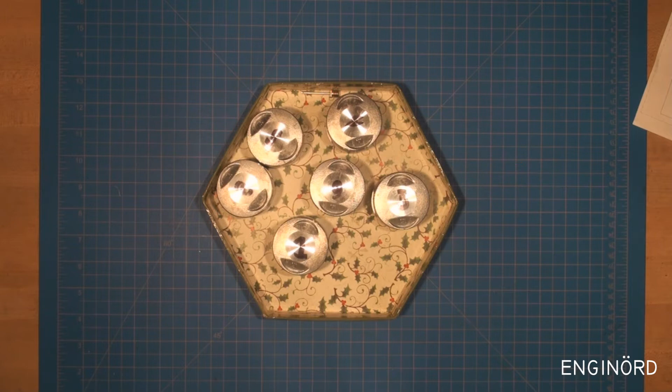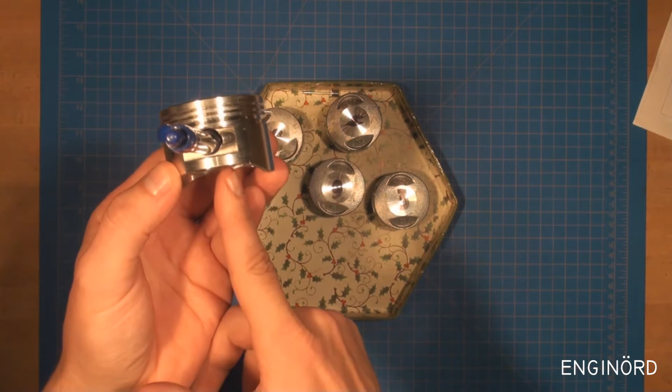Tonight we'll be talking about measurements, in particular measuring piston offset. We've got a couple pistons here from a Honda clone. Basically it's a Chinese clone of a Honda Cub engine. The bore on this one is 54 millimeters, and it is considered one of the newer engines that's out there.

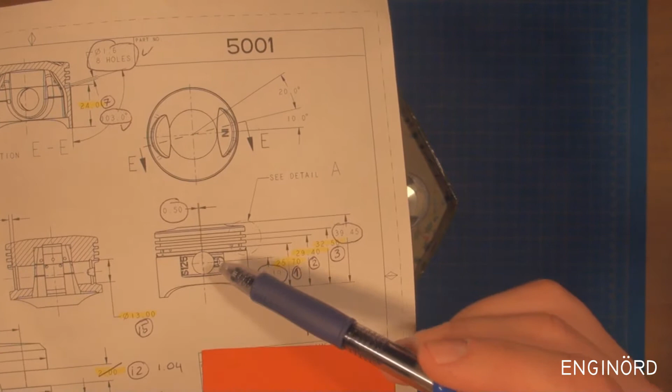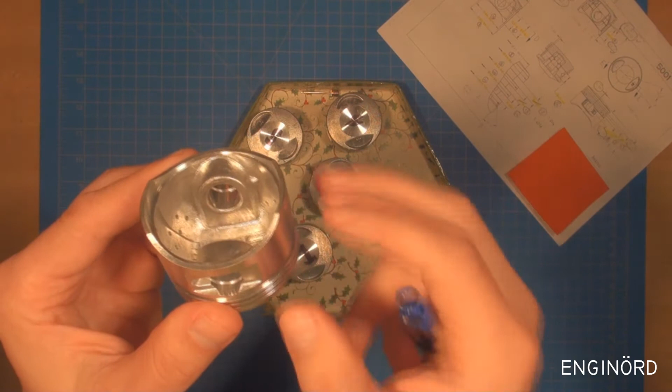Basically you can see on any of the newer pistons that there's a marking for the inlet valve, and so it's important that when you assemble the piston you orient the piston properly. When you join the piston with the connecting rod, you can join it this way, or you can turn it 180 and join it that way. Seemingly there is no difference. But if you don't do it in a proper way, you can degrade the engine performance considerably.

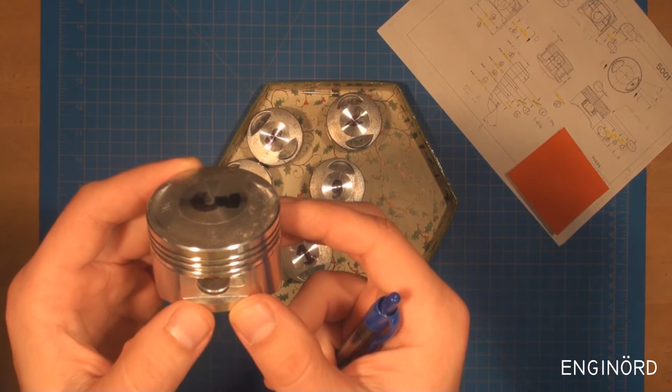What the engine designers do these days is offset the piston pin to one side. Typically it's being done to the inlet side. So wherever you have the inlet marking, that goes towards the inlet valve, and so this pin is being moved to that side. The distance is not much. It's typically less than 1 millimeter.

So what we will end up with is that the wrist pin axis, so this is the wrist pin axis, you can imagine an imaginary axis that goes through there, will not intersect the axis of the piston, which is here, so it's offset to one side, and that is the dimension that I'm trying to measure.

I created a preliminary drawing for the piston, and all the other dimensions I already measured, and this is the only dimension that I have not measured yet. I have a 0.5 millimeter offset shown here, but I'm not sure about it. This is based on the 3D scan data. We did a full 3D scan of the piston to establish especially these internal cast features.

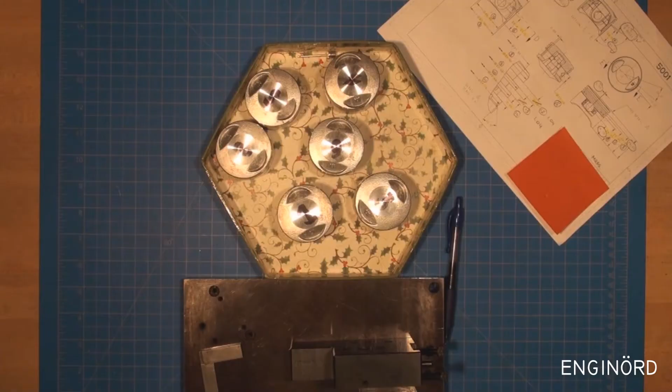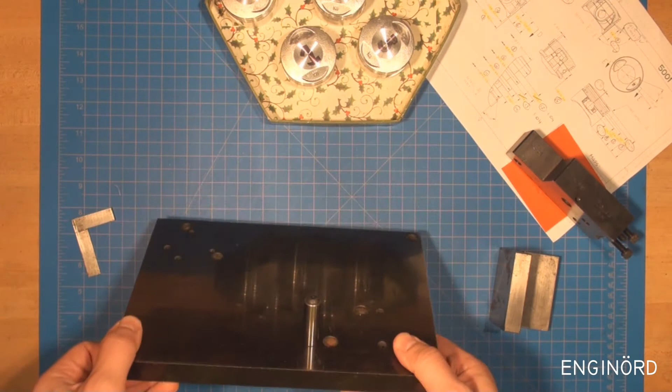A lot of these cast features are hard to measure with calipers or any other ways. It's easy to measure the outside dimensions, the machined dimensions, the thickness of the groove, this diameter, or this bore size with a caliper and other means. But getting to these nitty-gritty internal sizes and dimensions, figuring out if this is a cylinder, a taper, a cone, or whatever surface that is, that's why 3D scanning is great.

So based on the 3D scan, there's an offset to the piston. I think it's around 0.5 millimeter, but I'm not sure about it, and that's what I'm trying to measure. Why do they do it? There are multiple reasons to offset the wrist pin. One of the reasons is piston slap.

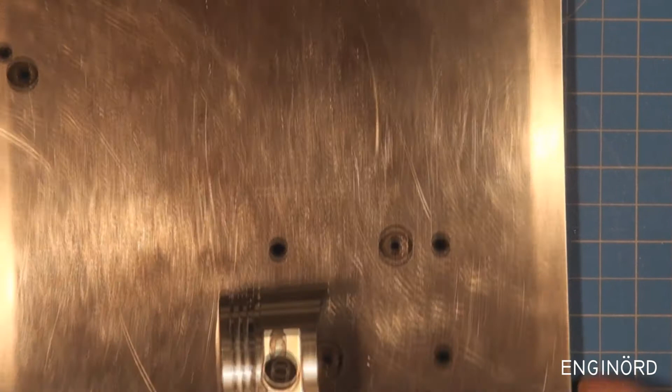When the piston is moving up it's going in one direction, and coming down it's going in another direction. So there's a moment at top dead center and bottom dead center where it's changing directions. That's when they say the acceleration goes to infinity. Obviously it's not infinity, it's some really high number, but that's when the piston slap happens, and that contributes to noise, and the designers are trying to minimize that noise.

Another reason why they do the offset is to decrease the frictional losses. The piston goes up and down, it's got a lot of friction with the cylinder wall, and to decrease those losses they do the offset. And some of the designers say that the most important reason is basically softening the reciprocating loading.

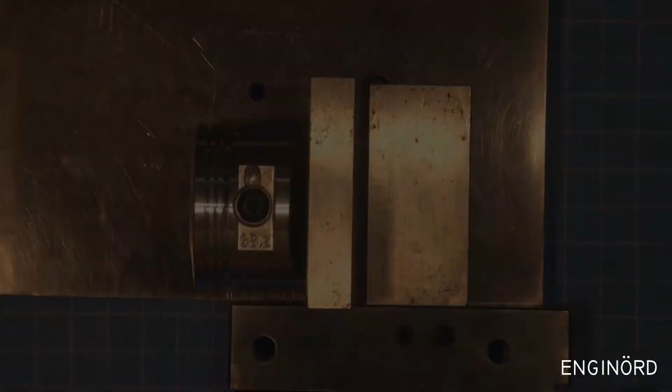The head of the connecting rod, the wrist pin, is offset relative to the center of the piston, so that the piston and the connecting rod are not going to reach top dead center at the same exact moment. That will spread out the impact loading at top dead center and at bottom dead center. And so I think that's the primary reason why they offset this pin.

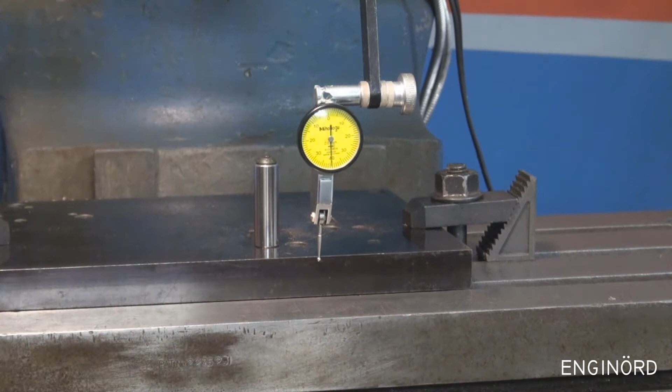So here's my idea of how I'm going to measure it. I got this big plate. It's a rather heavy ground steel plate, and on the plate I installed the wrist pin for that piston. I got it bolted down, and you can see that it's perpendicular this way, and it is perpendicular this way.

Okay, so now if I set this down here and I put the piston on it like so, let me get you closer.

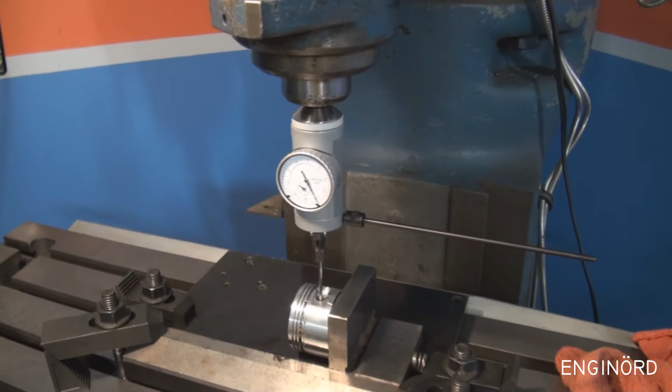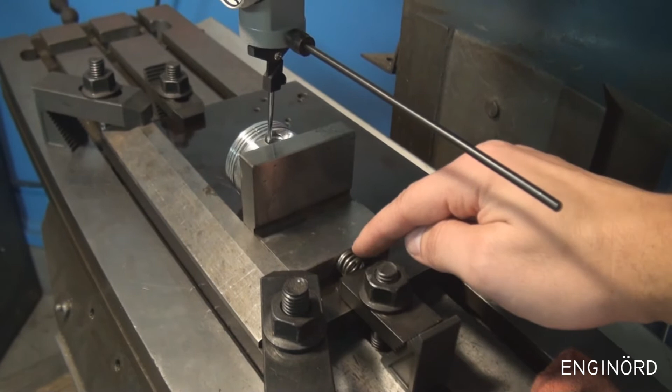Okay, so I put the piston on it. Out of the 6 degrees of freedom, I basically got rid of 5. Okay, so the piston is not moving in this direction, in this direction. It cannot rotate this way or this way. It can move up and down, but I can easily hold it down with some kind of bracket, some kind of mechanism. The only way the piston is turning is this way, okay, side to side.

But I can prevent that by adding another piece parallel to it like so, and then using this angle bracket, and when I push the angle bracket relative to that, then it will align the piston. So now I know that the side of the piston, this side, is parallel to the edge of the plate. So now I can set this up on my mill and use basically the Bridgeport mill as a CMM and measure the piston offset. So let me set it up and I'll get you guys back.

Okay, you can see the setup here. 1952 Bridgeport mill. I bolted the plate down to the table. Got this indicator, and the indicator is basically showing the run out, and you can see if I advance the table, it stays put. So the indicator is actually being held by the edge of the plate.

So now I reset to 30. So if I go to the other direction, you can see that the needle stays put. So now I know that this edge right here is parallel with the travel of the table. So that's the X direction.

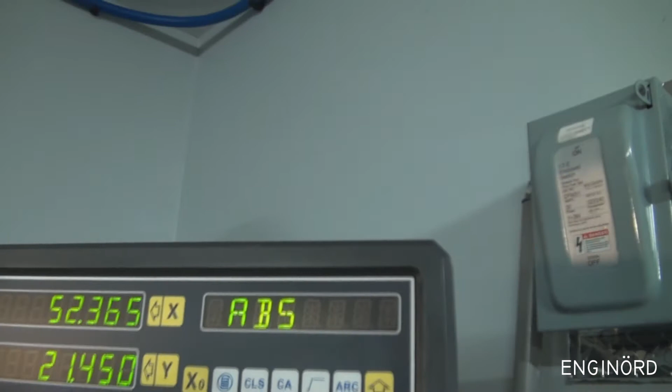Okay, so here is the second part of the setup. The first part is basically placing this plate on the mill table, and then I created this fence. Okay, this fence is parallel to the edge of the plate, which I indicated earlier. So this side, this back side of the fence, is parallel to the direction of travel. And what I did is I added this angle bracket. There's a little spring, and the spring is loading the angle bracket against the piston along the fence.

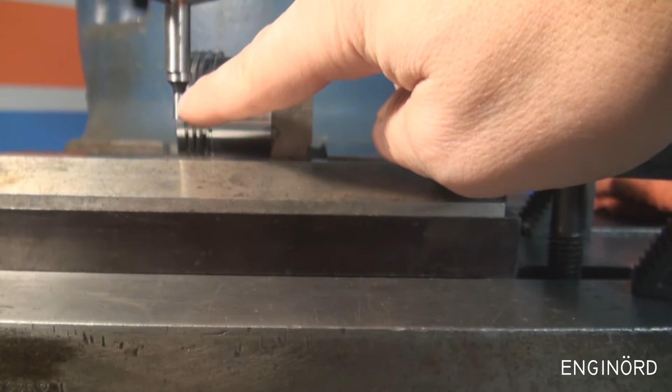So now I'm sure that to a certain accuracy, the side surfaces of the piston are parallel to the direction of X travel. Sorry about the noise, my phase converter is making the buzz.

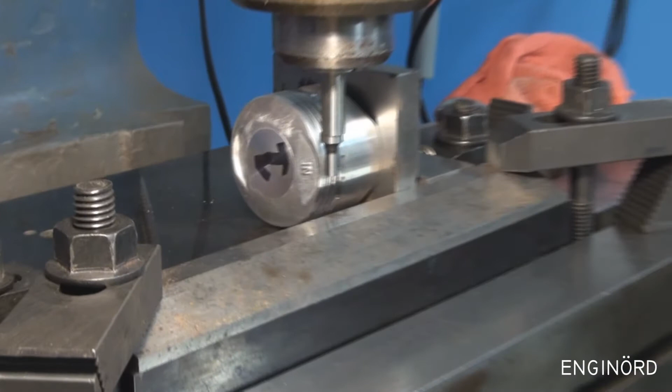So the next thing I did is I installed a coaxial indicator. Okay, so I need to put down the camera, and I'm going to turn on the mill. And what you're going to see is that the mill is running, and the coaxial indicator is testing the internal bore of the piston. Now if I start moving the y-axis, you can see that the needle is going to stabilize. And if I move it more, the needle will go out of whack.

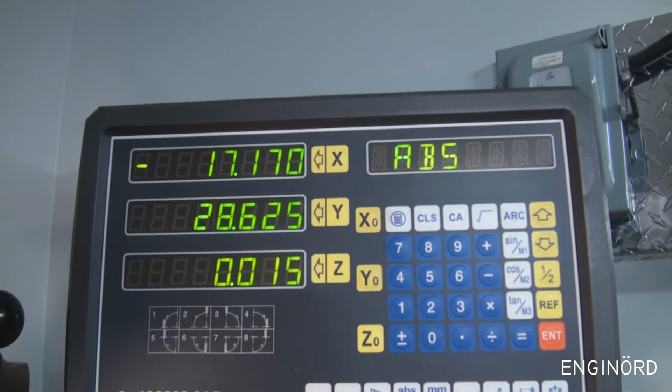So I'm going to go back and stabilize the needle and move the y-axis and move the x-axis until it completely stabilizes. And then once we're in that position, I can shut this off and I can go and zero out the x and y reading on my readout. So here's my readout, that's my y0 and x0. So now I know that the center of the spindle is coaxial with the center of the wrist pin.

So the next thing I'm gonna do is put in an edge finder and then find this side edge and find the other side edge and basically do the measurements. So now I have the edge finder installed, and what I did is I lined up the edge finder to this top diameter on the piston. Okay, you can see that it's lined up and it's somewhat below that diameter, so where the edge finder would be touching the piston.

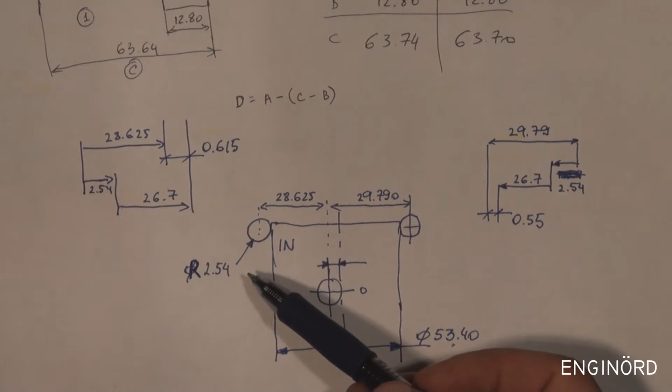So now I'm going to turn on the mill and use the edge finder to find that edge. Okay, so we're going to be coming in, and when it breaks off, that's when we know we found the edge. Okay, right there.

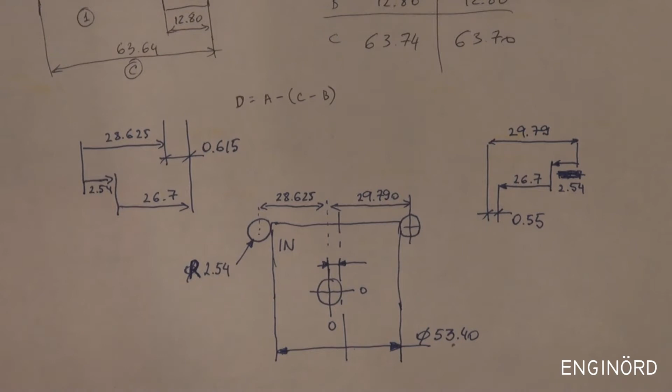So you can see that the edge finder broke off, and what we're going to do next is record this Y distance. So 28.625. We're going to go and do the other side. Okay, so I set it up for the other side. What I'm going to do now is just use the edge finder to find that edge.

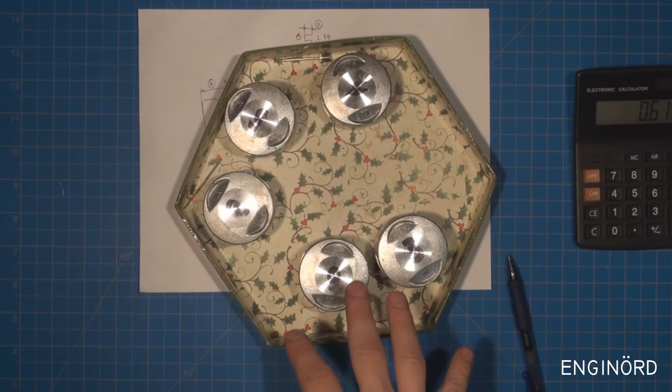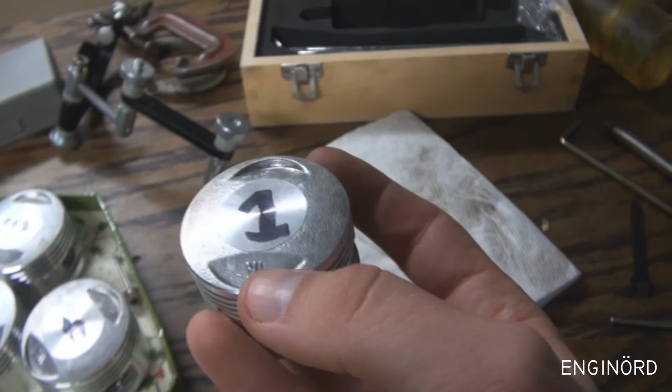Okay, so right there. Okay, so right there. So I found that edge. Now if you look at the display, you can see the reading is different. So 29.79. So we're gonna make a record of that.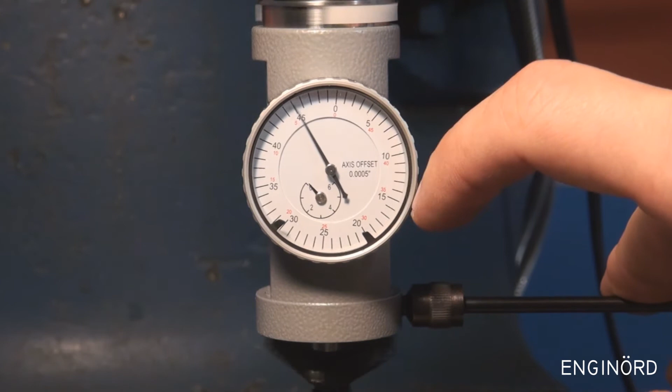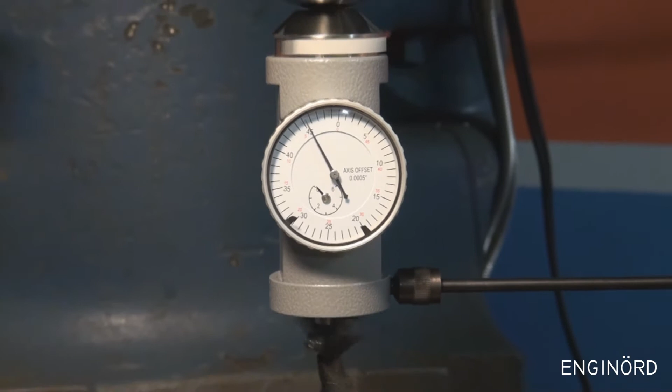So what I'm gonna do next is I'm gonna set up the other 5 pistons, and I'm gonna measure them the same way, create a table, and then basically just average it out and see what the average is showing.

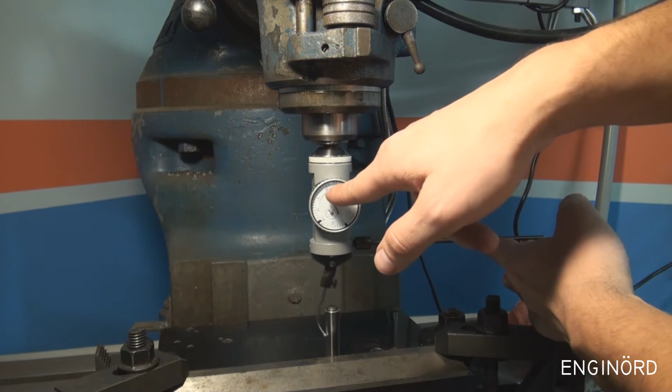So when I started measuring these parts, I looked at the piston again, and this was the number 1 that I first measured. You can see the intake is here, so piston was resting like that, and what you can see is that the coaxial indicator's tip left an imprint inside the bore, so I didn't want that to happen to the rest of the pistons. Right there you can see that groove. So this tip that I used on a coaxial indicator, it's hard steel, this is soft aluminum, so it created that imprint, and I don't like that.

So what I did is I went back and I installed this different style of tip on a coaxial indicator, and basically indicating the pin, and it was a lot easier to go back to 0. And I want to show you, I need to turn it on, but at the same time I need to hold this with my hand. Let me get you back. Okay, so we are back, and what I'm gonna do is turn on the mill.

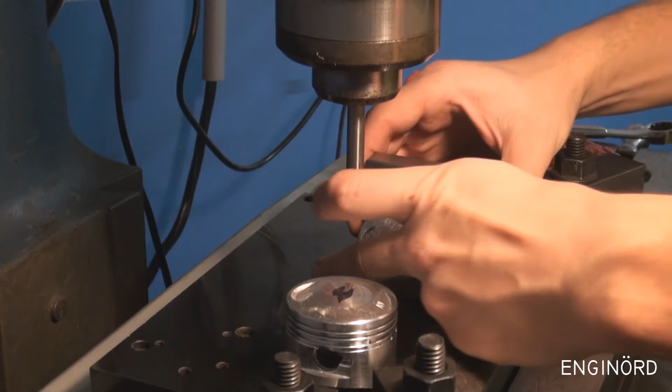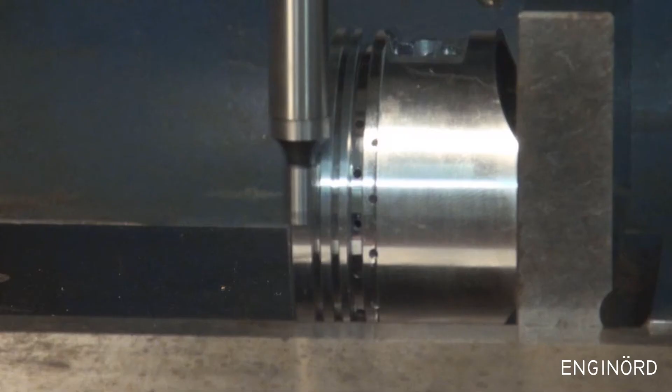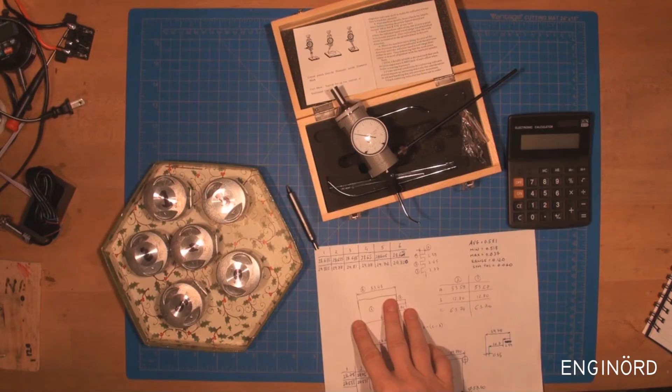The other interesting thing is, if I zoom out, you can see that the tip of the indicator is right at the top of the pin. Now if I start sweeping down, I am moving down the quill, and you can see that the reading stays the same. So that gives me high confidence that this pin is not only at the center, but it is perpendicular to the plate. If it were at an angle and I sweep down, then the reading of the indicator would be off. But you can see I can sweep up and down, and that reading doesn't really change. So what I'm going to do is use this setting and go ahead and measure the rest of the pistons.

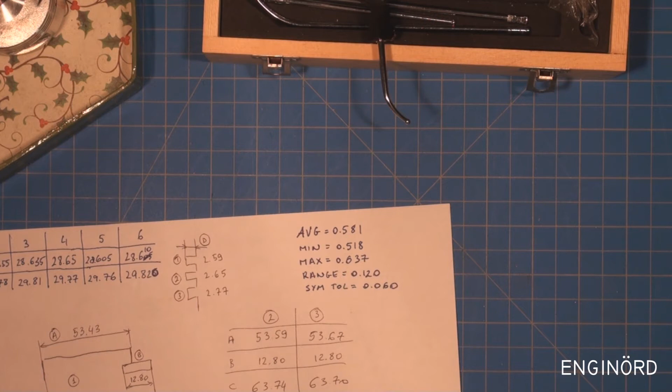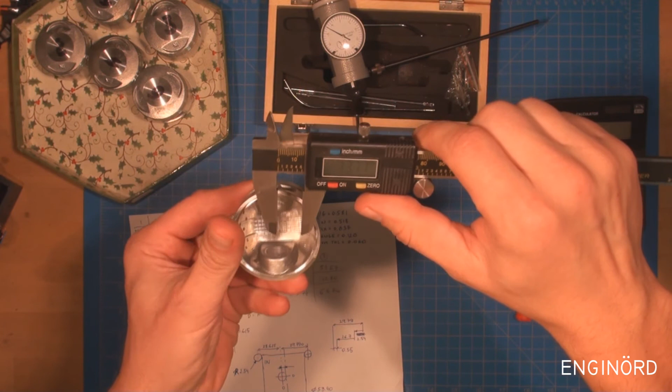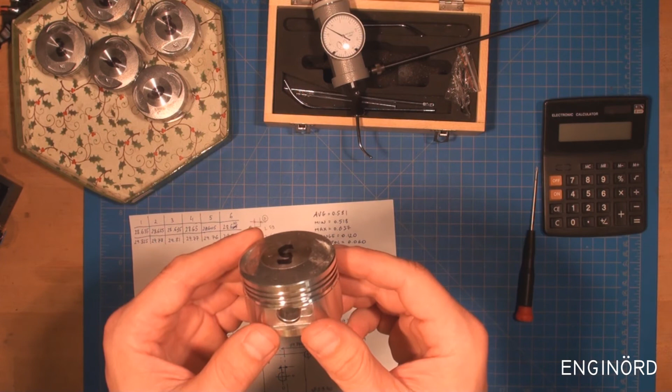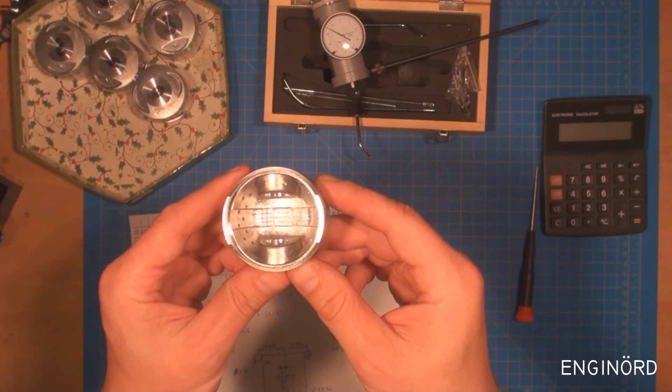I went and measured all of the pistons, and these are the numbers that I came up with. And you can see they are pretty consistent: 2863, 65, 63, 65, and then these two, 5 and 6, are outliers: 28605 and 28610. And then on the other side, 29, 82, 78, 81, 77, 76, 82. So I'd say that this side is more consistent.

So what I did next is I had some previous measurements where I measured this diameter. It's slightly different, so it's around 5340, but again I measured that just with calipers. Okay, so you can see this only has 2 digits. I don't have a micrometer that I would be able to use for 2 to 3 inches. That's what I would need here.

So after I put everything into Excel and summed it up, this is what I came up with. So the average dimension for the piston offset came out to be 0.581. The minimum is 518, the maximum is 637, and so that will give me a range of 120 microns, where the symmetrical tolerance would be about 60 microns. So I am measuring a 600 micron-ish dimension, and my tolerance is plus minus 60 microns, so that's 10%. So the tolerance field is about 20% of the size.

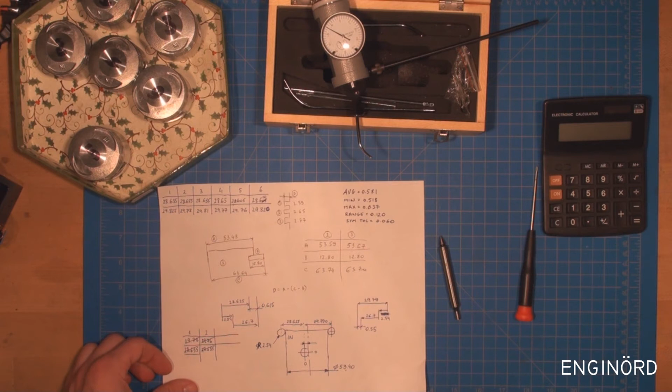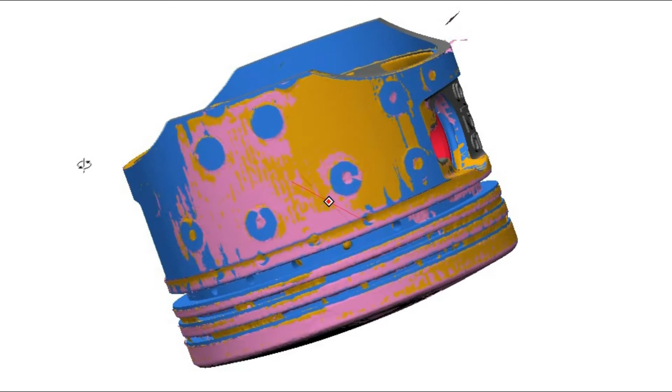Is that a good measurement? Well, heck no, I'm not proud of it. But considering everything, I think this is still a viable solution for a home tinkerer like me, who doesn't have access to a CMM. Obviously this piston offset is not something that you can measure with a caliper. I mean, you cannot touch that axis and measure that axis relative to this axis. It's just not possible. I can assume that there are some similar measurements that I could have done.

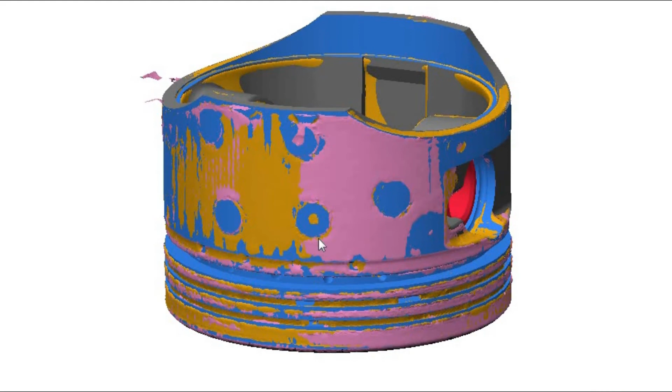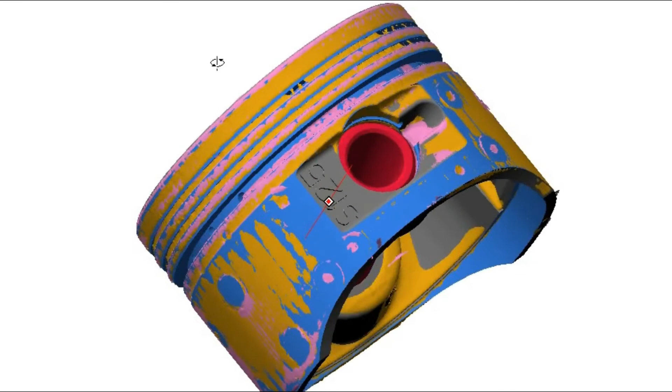I was thinking about one where the piston would be vertical like this, and then I would come in and find the center of this cylinder, and then the pin would be installed in here, and then I would come in with the edge finder and basically touch the pin on one side, touch it on the other side, and that would give me a similar measurement.

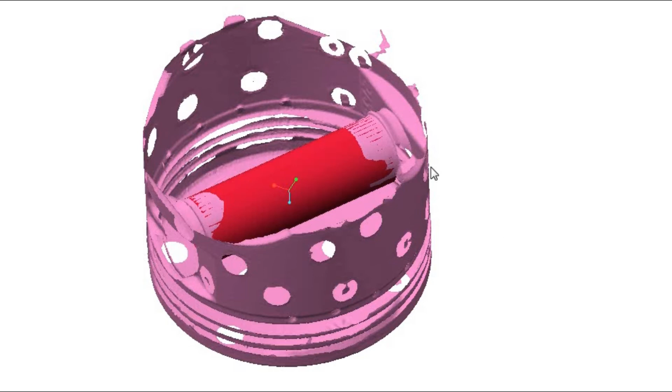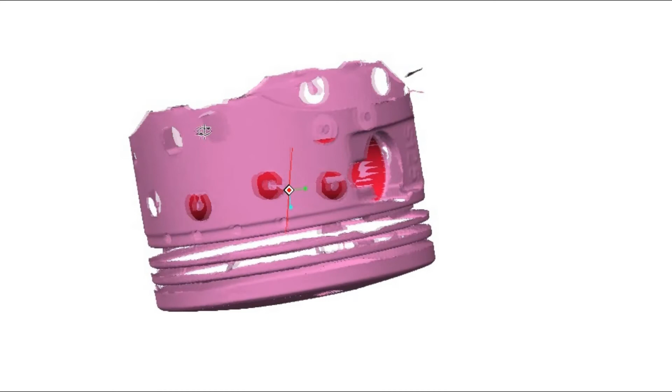The problem with that is that, again, the piston has another degree of freedom that I'm not going to be able to resolve, and namely this rotation. So when I want to make sure that the piston is perpendicular to one of the axes on the Bridgeport, I cannot possibly set this up properly. Okay, so there will always be some kind of error. I can compensate for that error by bringing the edge finder close to the center.

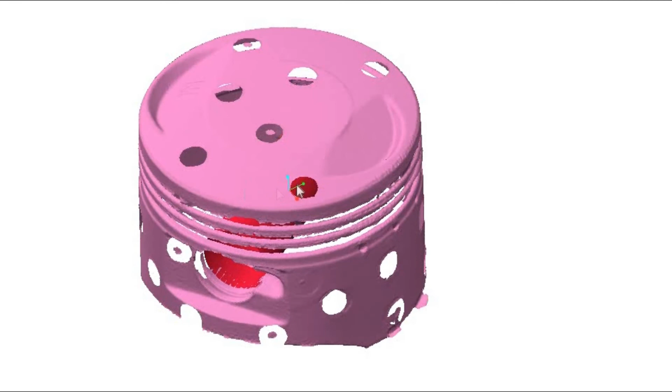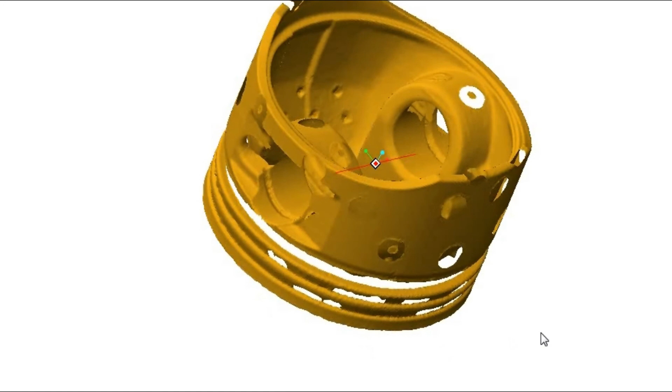So that was one of my ideas. I went ahead with this solution. Kind of worked out fine. I'm just going to stick with this dimension for the time being. Here's a 3D model of the piston overlaid with the 3D scans. So the blue piece is the piston itself, the pink is one of the scans, and then the orange is the other scan. And you can see there's good agreement between the 3D model and the scan data.

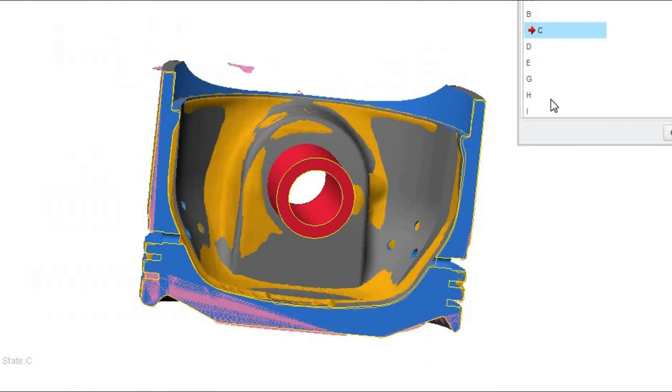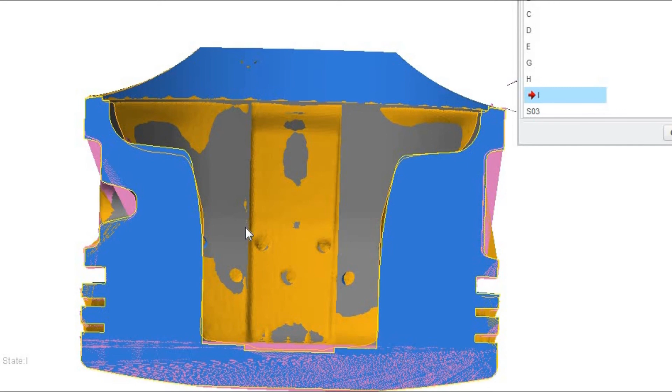The round dots that you can see are the scan target stickers. So there are these round dots all over the place, and we place those for the scanner so that when we reposition the part, the scanner will be able to pick up where it left off earlier. In this assembly I also have the wrist pin installed. This scan captures the outside of the piston.

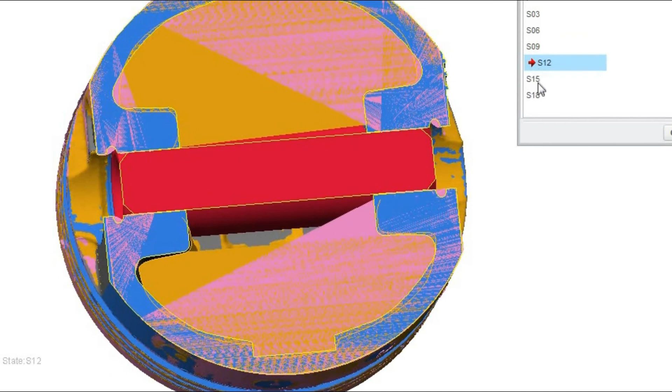You can see, if we have high quality surfaces, like in this case the wrist pin bore here overlaid with the mathematical model of the wrist pin, the software will not be able to distinguish between the two surfaces, so you end up with this zebra stripe pattern, and that's what we are after. That's when we know that the scan is high quality. So not many scanners can do that.

Again, there's these targets everywhere for scanning, and you can see that the scan captured both the machined surfaces on the top of the piston and the cast surfaces with high accuracy. This is the inside of the piston, and you can see all the cast surfaces were captured with really nice accuracy.

So here is the assembly again. If I turn on some of these sections, you can see that there's real good agreement between the scan and the 3D model. So right here you can see the contour of the scan relative to the 3D model. Here's another section where you can see that the mathematical model is precise, but the actual part is all over the place. If I match one side, the other side, which is supposed to be symmetric, will be off. But that just tells tales about the quality of the parts that we buy from China.